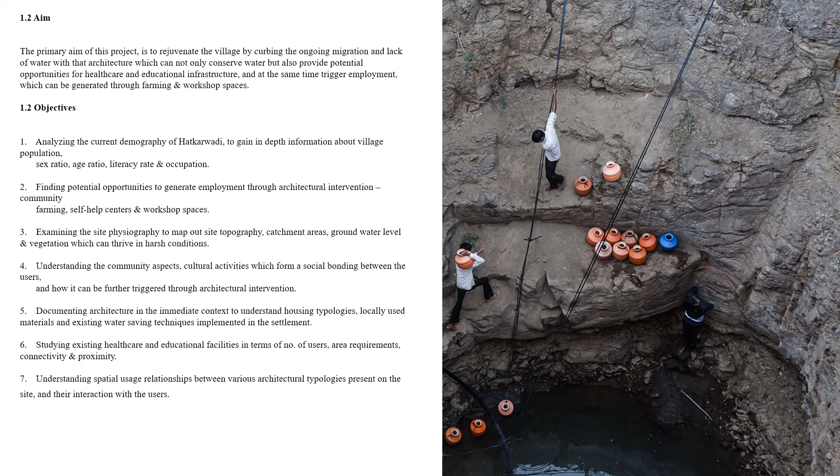Scopes and limitations: the scope lies in studying the settlement of Hatkarwadi, analyzing its demographics and present situation with regards to education and healthcare, to try and arrive at a multifaceted architecture that can not only tackle the issues that come up, but also keep in mind the aspects of community involvement and sustainability.

Although in a real life scenario a real-time procedure has to be followed to locate potential water sources by means of a piezometer survey, here we don't have the means to do the same. However, an informed guess has to be taken to the best of what is possible by referring to the current well locations, the site survey, and where the potential water resources are found.

Here, a table is given acknowledging all the challenges and the solutions to the challenges which Hatkarwadi presents.

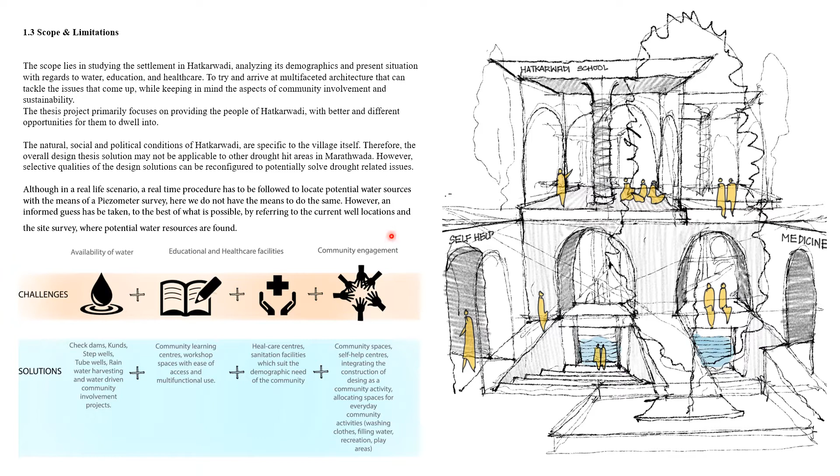A public survey was conducted to understand the views of fellow individuals on water conservation and drought conditions. It is observed that a large number of people know about the water scarcity in Maharashtra but not in depth. Most individuals also agree that solving the water crisis will in turn lead to reduction in migration. There was a positive response when asked if traditional techniques like step wells, bawris and kunds can be re-engineered to conserve water in today's times.

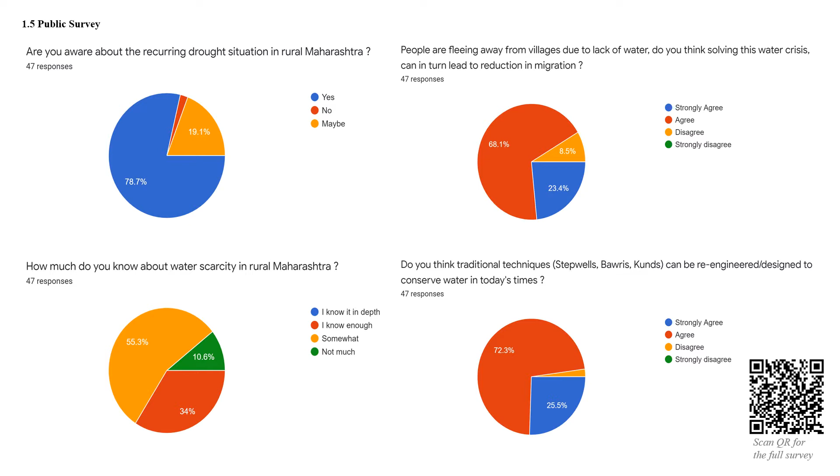The literature study has been divided into four sub-chapters, which focused on the study of drought, groundwater and aquifer recharge, water conservation, and building bylaws.

Drought definitions: the meteorologist defines drought as a lack of precipitation, while the agriculturist defines it as a crop failure due to lack of soil moisture. The hydrologist defines drought as a reduced surface and groundwater level, and for urban planners it is a shortage of drinking water. So there are various different definitions of how a drought can be defined, and some of the commonly accepted and used definitions are given below.

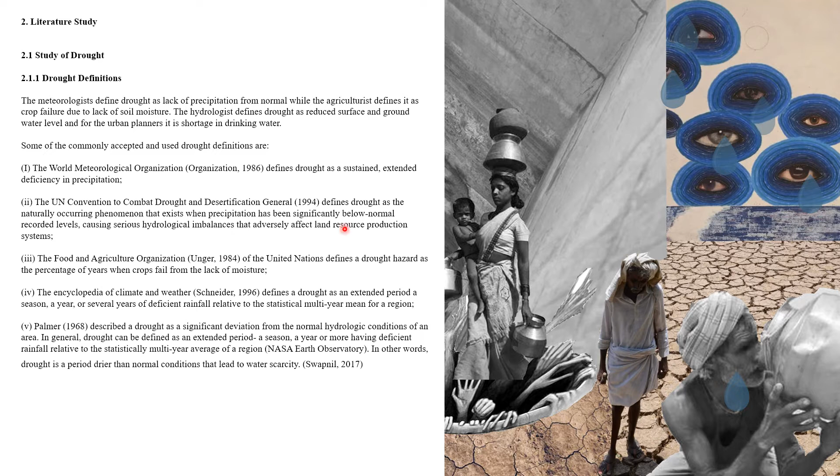Types of droughts: droughts are classified into four major categories such as meteorological, agricultural, hydrological and socio-economic drought. Meteorological drought is usually defined as a precipitation deficiency from climatic normal over a specific period, while agricultural drought occurs when there is insufficient soil moisture to meet the needs of a particular crop at a given stage.

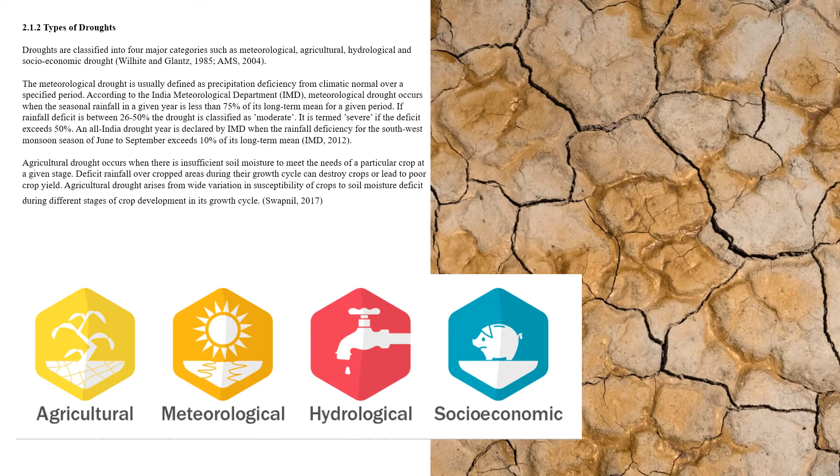Agricultural drought is further categorized by the timing of rainfall deficiency in the southwest monsoon period and its impact according to the crops and their growth stages. It is mainly divided into three categories: early season drought, mid-season drought, and late season drought.

On the other hand, hydrological drought is defined by the departure of surface and subsurface water supplies from some average conditions at various points of time. The table here shows us natural climate variability and its various impacts with regards to economic, social, and environmental impacts.

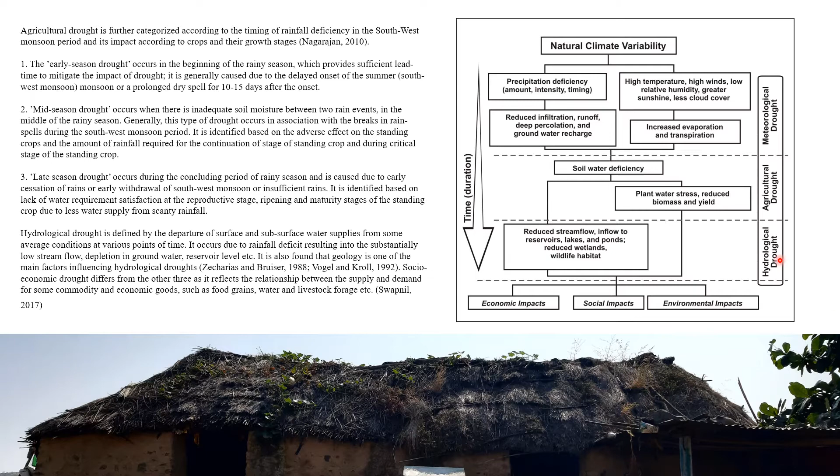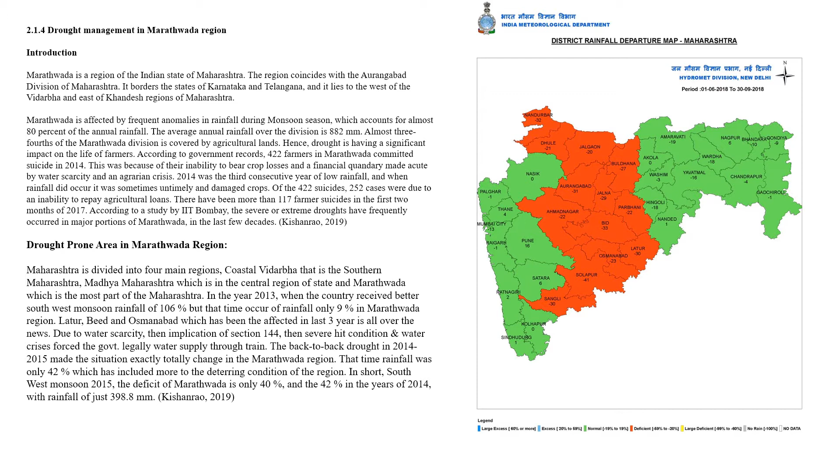Drought management in Marathwada region. In this chapter, we look at the drought-prone areas in the Marathwada region, and some of the initiatives taken by the government in the view of schemes which can help in tackling water scarcity and the issues generated through drought conditions.

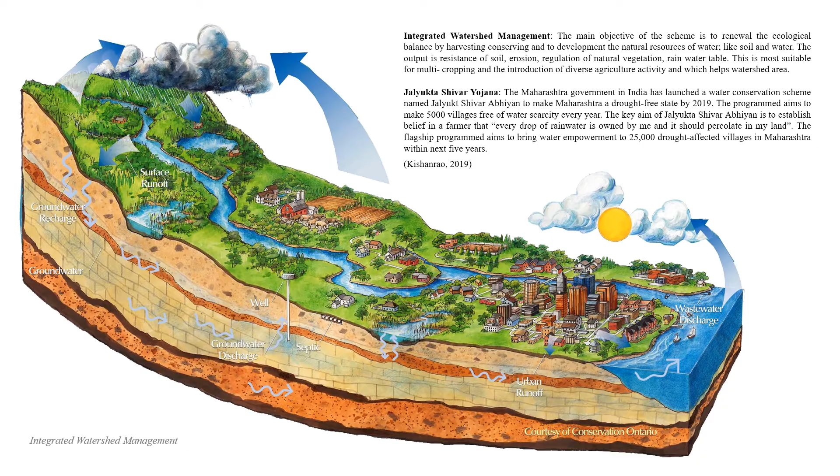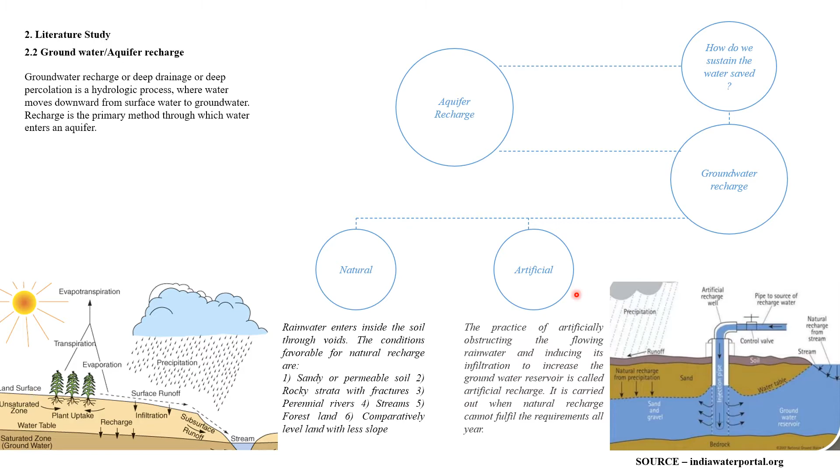Groundwater and aquifer recharge: here we also look at various groundwater and artificial recharge techniques, both natural and artificial. This slide shows how these techniques can be used in the context of Hatkarwadi.

The present condition in Hatkarwadi only allows specific recharge methods to be used. A combination of artificial channel, recharge wells, and injection methods can be used to efficiently recharge the ever depleting groundwater in Hatkarwadi.

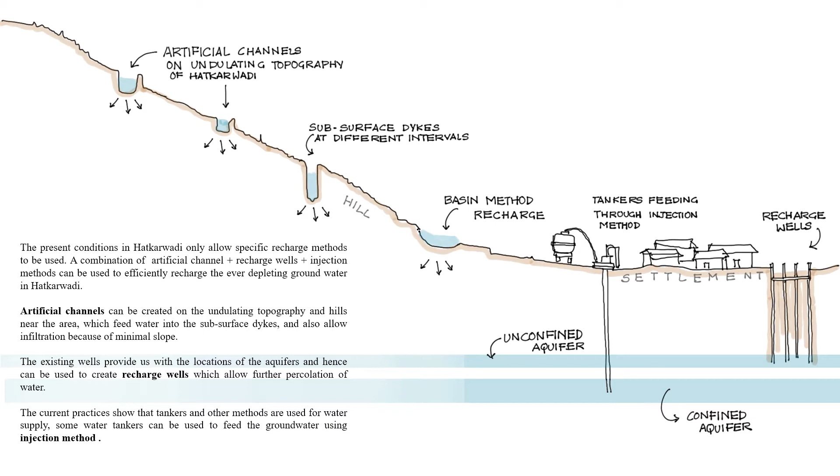Here are some examples of how these techniques are implemented in a real life scenario.

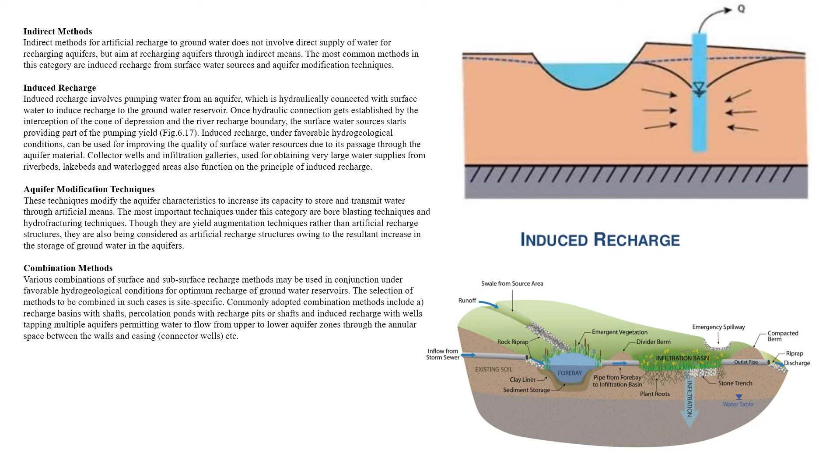Water conservation architecture: the stepwells of Gujarat.

Gujarat is a state on the western coast of India with a coastline of 1,600 kilometers, most of which lies on the Kathiawar Peninsula. It has a population of 60 million, making it the fifth largest Indian state by area and the ninth largest by population.

The construction of stepwells in the arid and hot climate of Gujarat, similar to Hatkarwadi, is an interesting example of people's response to adverse climatic and geographical conditions. These structures preserve and store water, the most essential precondition of life, as long and fresh as possible even during the hottest summer months. They have narrow stairs going deep into the earth to expose as little surface area as possible to the sun, providing large areas of shade across various stories and galleries.

With recent industrial development, many stepwells have lost their inherent function of water supply and storage, and are either deserted or in a broken-down condition due to neglect and lack of interest from people living nearby. However, a large number of stepwells are still in use, especially by women who fetch water, wash clothes and utensils, or bathe in them.

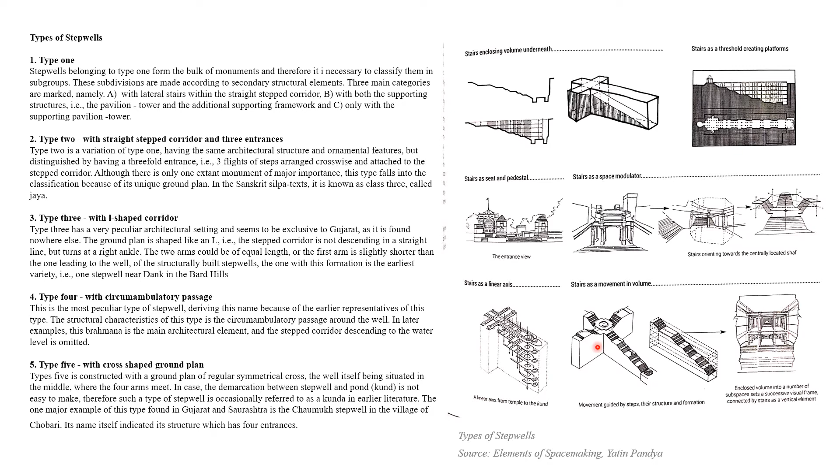There are various types of stepwells, primarily categorized on the basis of approach and movement in volume. The figure on the right shows how these stepwells exhibit different spatial qualities.

A bauri is a man-made pond with significant ornamental and architectural structure for conservation of water in ancient India. These wells are commonly found in the western region of India for irrigation and storage of water, mainly to cope with seasonal fluctuations.

Abaneri near Jaipur has the largest stepwell of India, named Chand Bauri. It is situated 95 kilometers away from Jaipur and is a fine example of architectural expertise, with 13 stories and 3,500 steps. It is the deepest in the world.

Hatkarwadi is a village so imperceptible, with its small population, that it faces little or no effect of the building bylaws. However, it is important to acknowledge the bylaws during design. Hence, these laws are taken from the CPWB and pertain to Beed district as a whole.

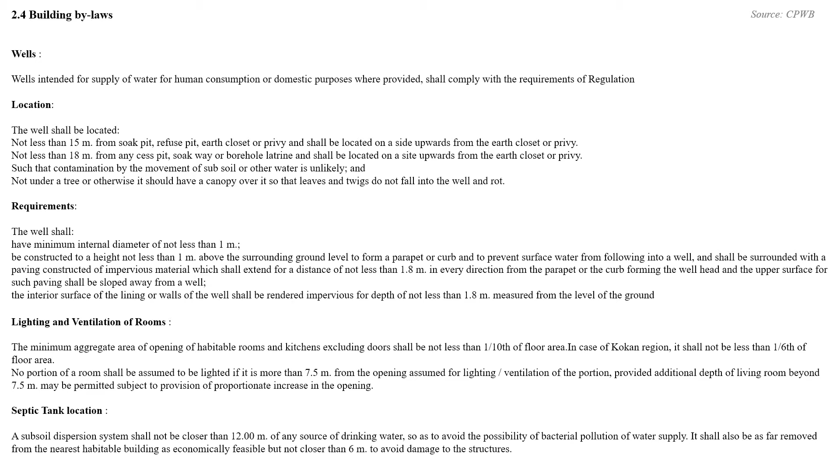The case studies identified for this design topic are categorized based on the challenges Hatkarwadi faces today: availability of water, educational and healthcare facilities, and community engagement.

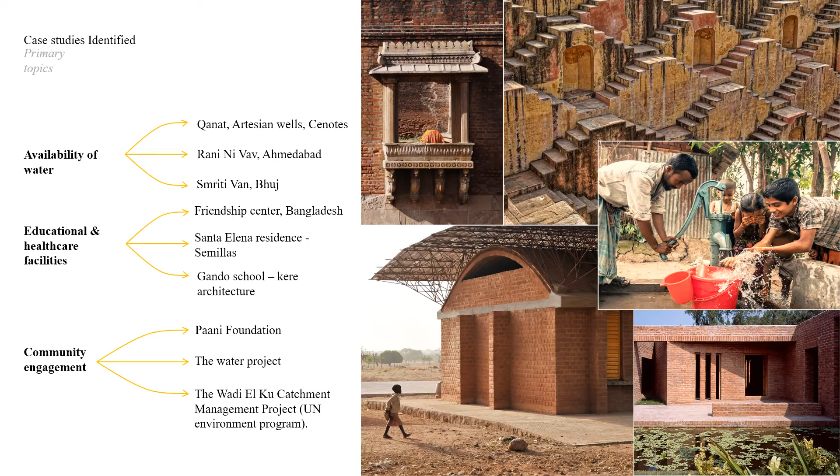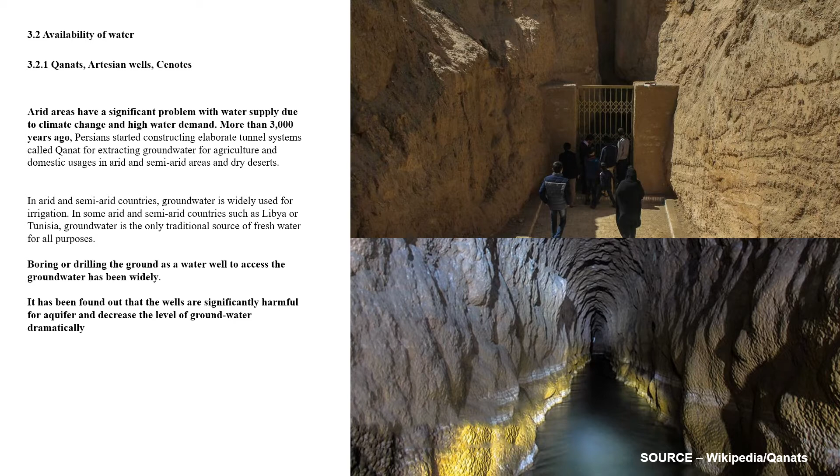Availability of water: arid areas have a significant problem with water supply due to climate change and high water demand. More than 3,000 years ago, Persians started constructing tunnel systems called Qanats for extracting groundwater for agriculture.

Qanats are artificial underground water channels up to 300 meters deep beneath the earth's surface, bringing a continuous stream of water for human, agricultural, and domestic use. The water is not lifted to the surface but flows down through a channel, as if a normal well has been flushed over on its side, until it flows out from its aperture. Qanats are usually excavated where there is no surface water.

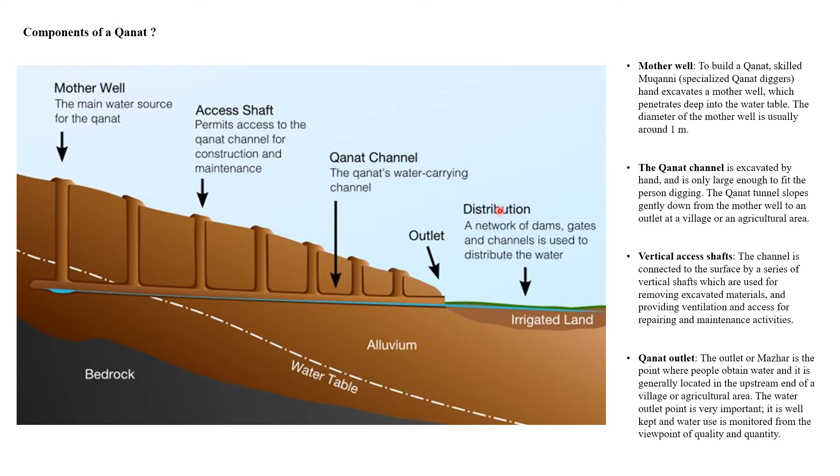There are various components of Qanats: the mother well, the Qanat channel, vertical shafts, and the Qanat outlet. The mother well is the main source of water for the Qanat. The access shaft permits access to the Qanat channel for construction and maintenance. The Qanat channel carries water, and the outlet is where distribution happens through a network of dams, gates, and channels.

Modern-day Qanats: a rainwater infiltration system can be applied with the Qanat system to maximize infiltration during times of intensive rain in the desert, or to protect Qanats from collapsing.

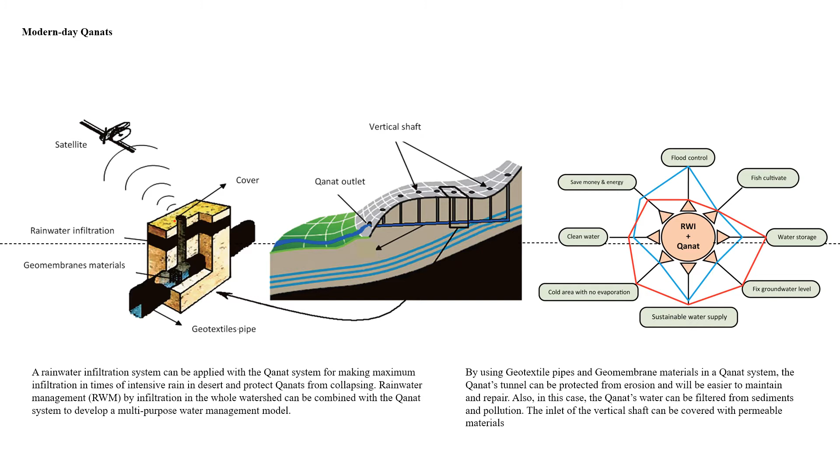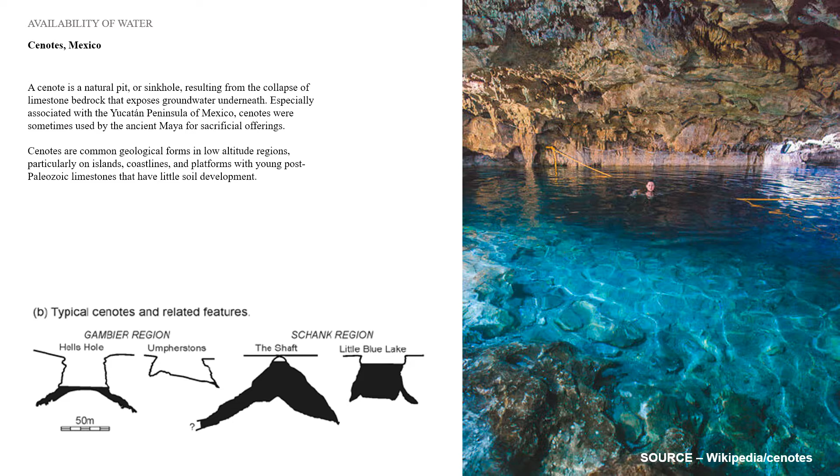Cenotes, Mexico: a cenote is a natural pit, a sinkhole resulting from the collapse of limestone bedrock that exposes groundwater underneath. A vast majority of cenotes are located in the Yucatan Peninsula. These areas have very porous and soft limestone soil, which, when collapsed by the action of rain and underground rivers, gives rise to the formation of cenotes.

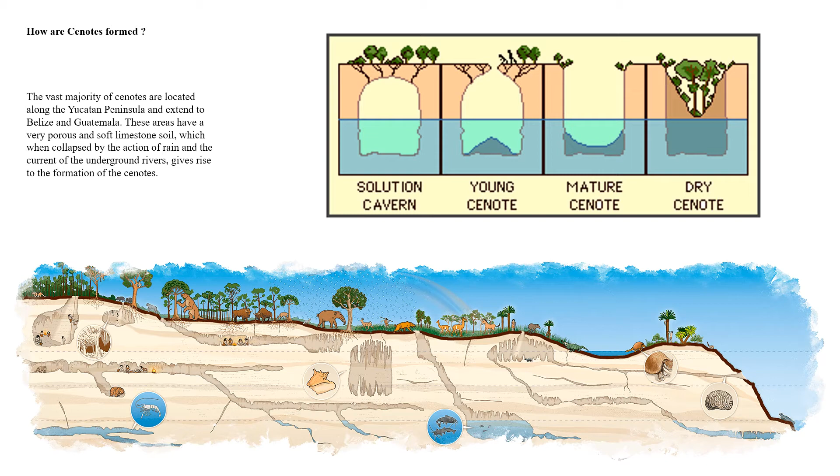Cenotes are very much interlinked with civilization. At Chichen Itza in Mexico, the cenotes were first found and the civilization was built around them. Similarly, the Kankalitala Shaktipeeth in West Bengal has a cenote around which the temple is situated, and it is said the water never dries up. This tells us about the interaction between humans and water.

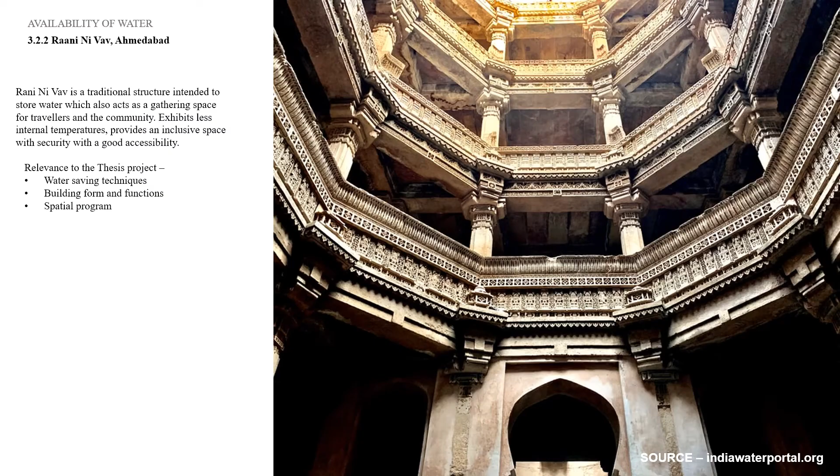Rani ni Vav is a traditional structure intended to store water, which also acts as a gathering space for travelers and the community. It exhibits less internal temperature and provides an inclusive space with security and good accessibility.

Rani ni Vav is categorized as a subsoil aquifer. It is oriented east-west, with the well in the west and the entrance in the east. It measures up to 64 meters long, 20 meters wide, and 27 meters deep.

It has four essential components: a staircase leading from ground level to the underground basin, a multi-storied pillared pavilion which can be used as a good community space, a draw well at the end, and a large tank to store surplus water from the well.

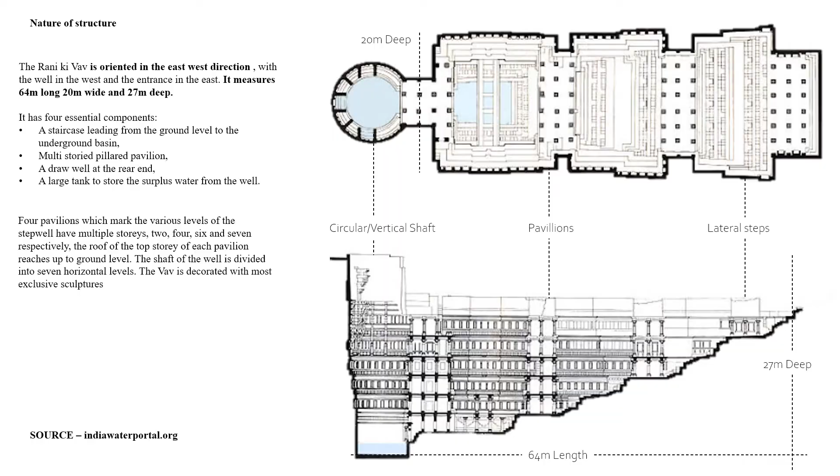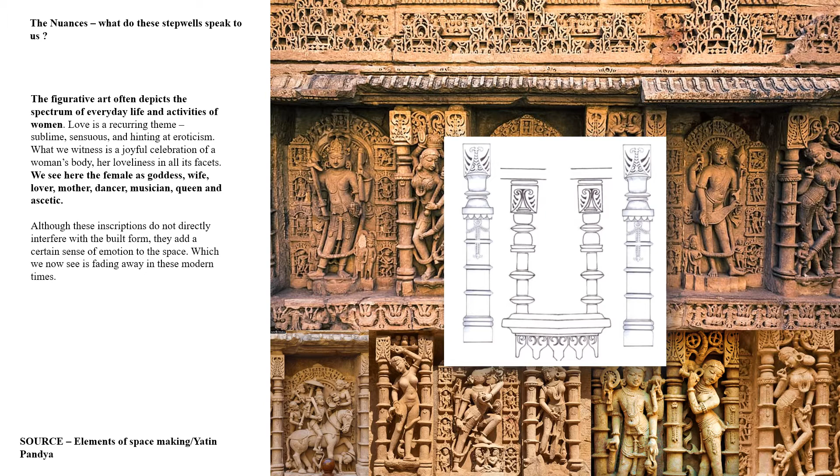The figurative art often depicts the spectrum of everyday life and activities of women. Although these inscriptions do not directly interfere with the built form, they add a certain sense of emotion to the space, which we now see fading away in this modern time.

The Earthquake Memorial, or Smriti Van, is envisaged as a rejuvenation of this landscape and as a tribute to the extraordinary resilience of the people and their acceptance of the calamity with great equanimity. The client's brief for the memorial was planting 13,805 trees, each representing one victim.

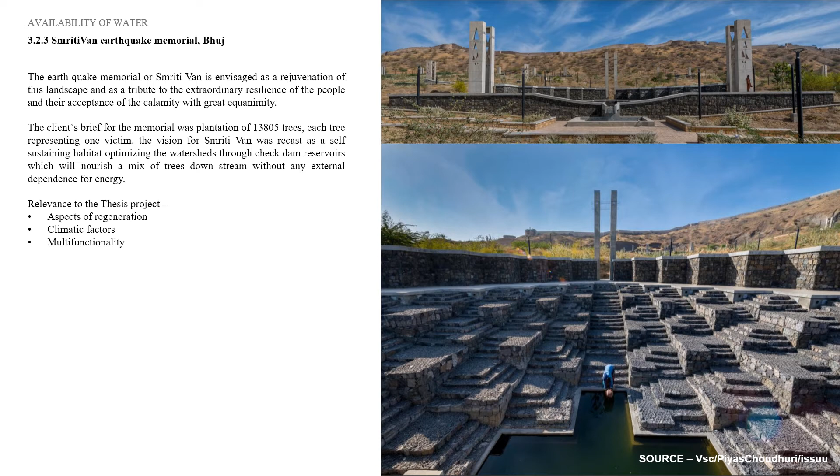The vision of Smriti Van was recast as a self-sustaining habitat, optimizing the watersheds into check dam reservoirs which will nourish a mix of trees down the stream without any external dependency. The relevance to this research project includes aspects of regeneration, climatic factors, and multiple functionality.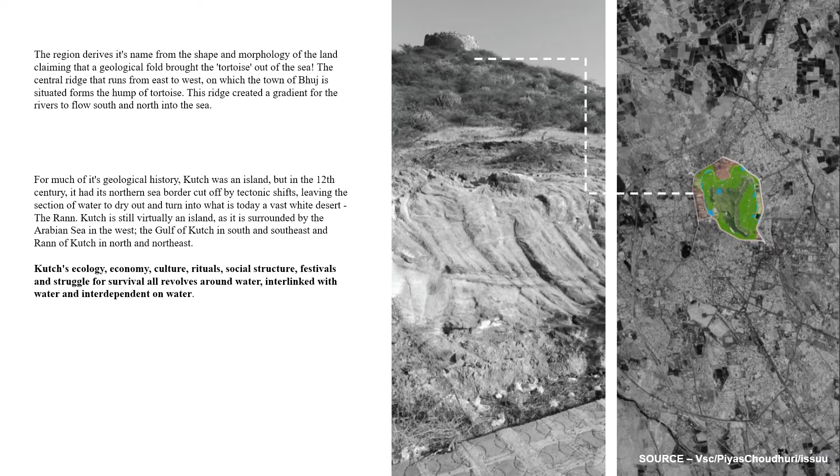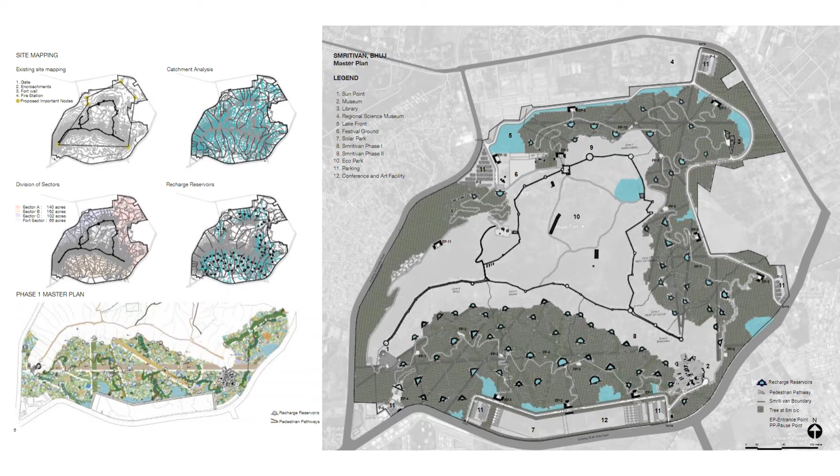This is the master plan for Smriti Van. The master plan envisages 81 reservoirs to collect the runoff from Bhujiyo Dungar. This gives us an idea of the scale of Smriti Van.

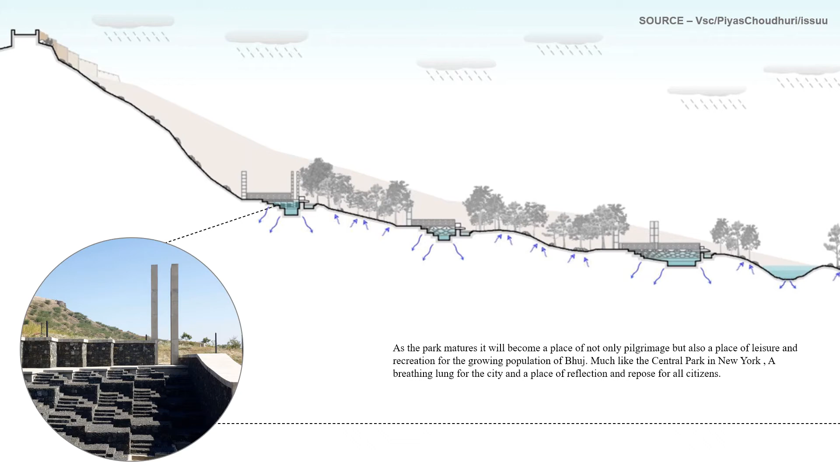Here we can see the section of the check dams through various contour levels on the Bhujiyo Dungar. The reservoirs are made of gabions, which are entirely without mortar and thus allow for arresting rainwater of the watershed, but also allow it to dissipate into the ground slowly, allowing the root system of the trees to draw upon it.

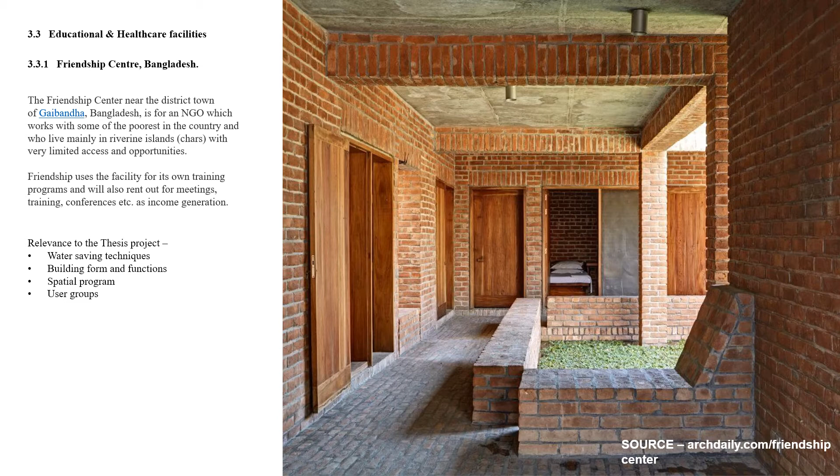Educational and healthcare facilities: Friendship Center in Bangladesh. The center serves and brings together some of the poorest of the poor in the country, and by extension in the world. Friendship uses the facility for its training programs and also rents it out for meetings, trainings, and conferences as income generation. The users are mostly construction workers, maids, rag pickers, and NGO workers.

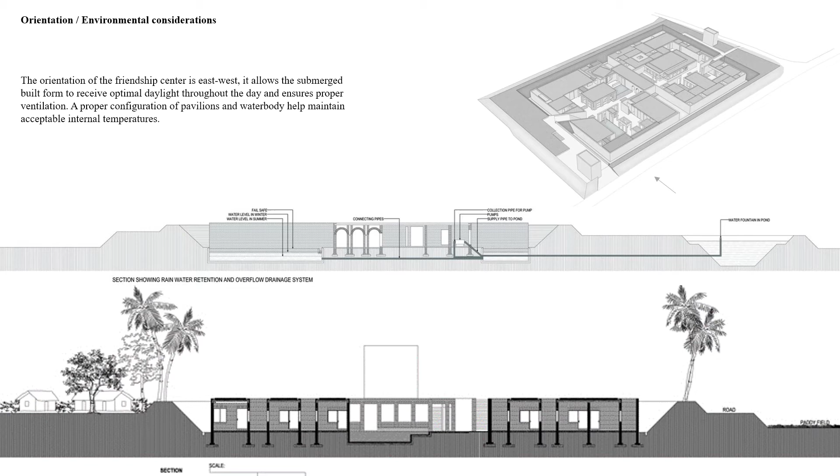The Friendship Center is essentially arranged in two blocks, the Ka block and the Kha block. Here we can see the spatial organization and the circulation.

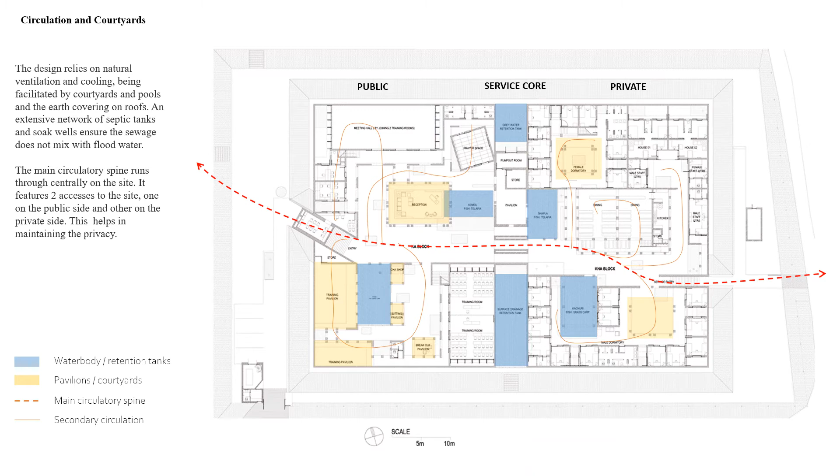Retention ponds capture the diverted storm water. These ponds provide two primary services: they retain the runoff before releasing it, and they release the water at flow rates and frequencies similar to those that existed under natural conditions.

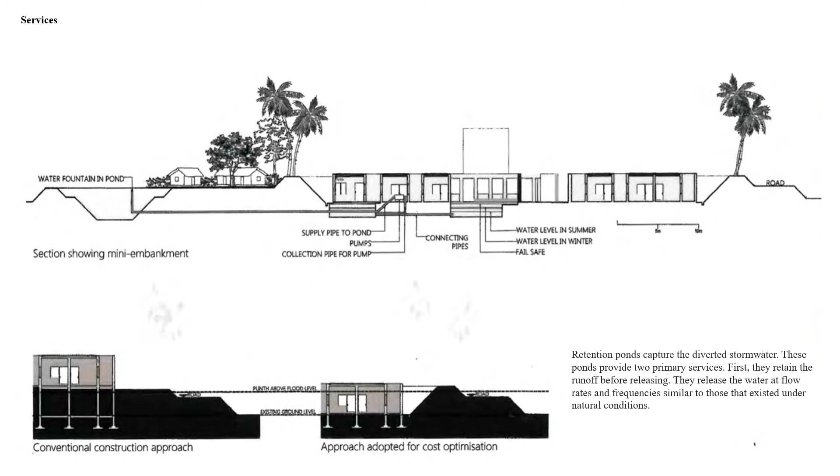Gando is a village of 3,000 inhabitants situated in the remote east of Burkina Faso. Most of the people are subsistence farmers with their livelihoods dependent on the harsh climate. There is virtually no rain between October and June, and the daytime temperatures can reach 45 degrees Celsius in the shade.

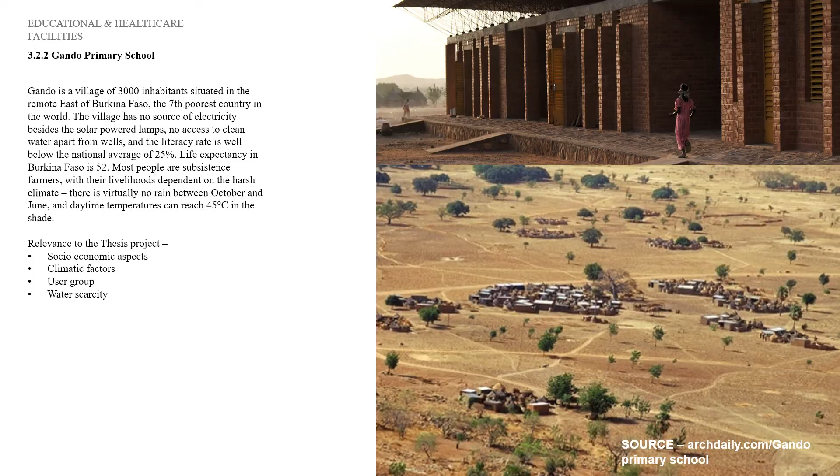The user age group is from 6 to 15 years.

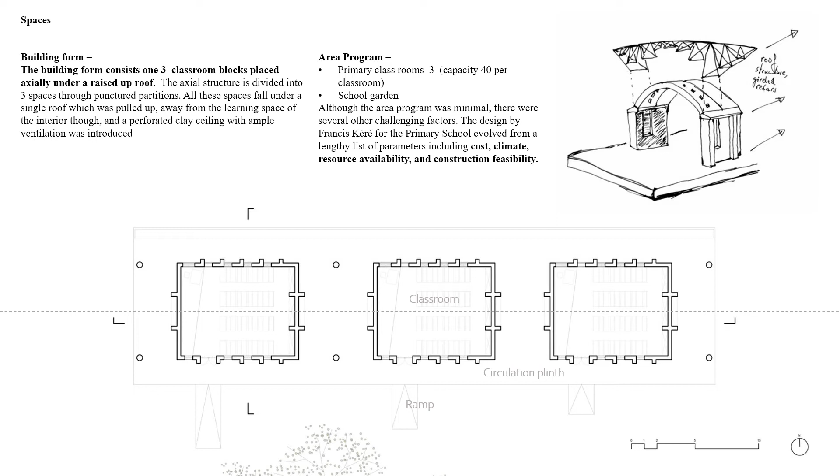Circulation pathways on the raised plinth surround each classroom.

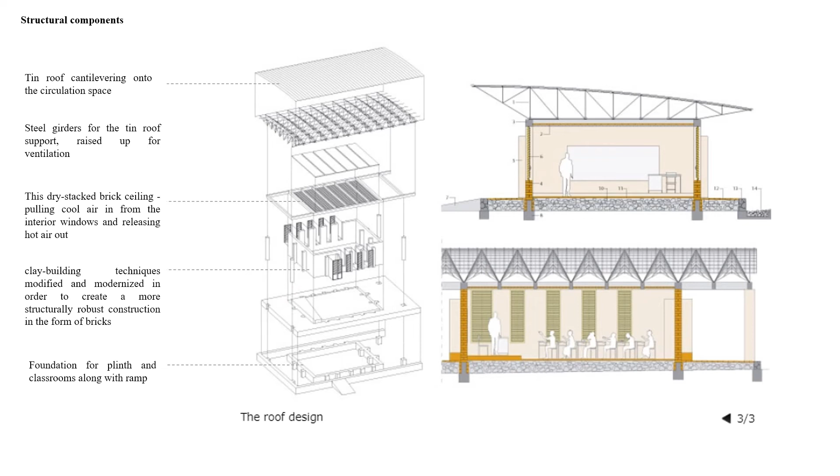These are the structural components of the school. You can see three common materials which are used in the Gando Primary School.

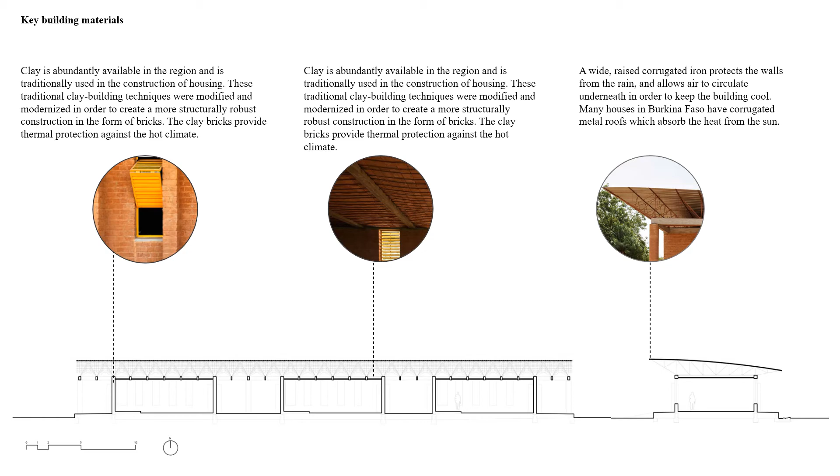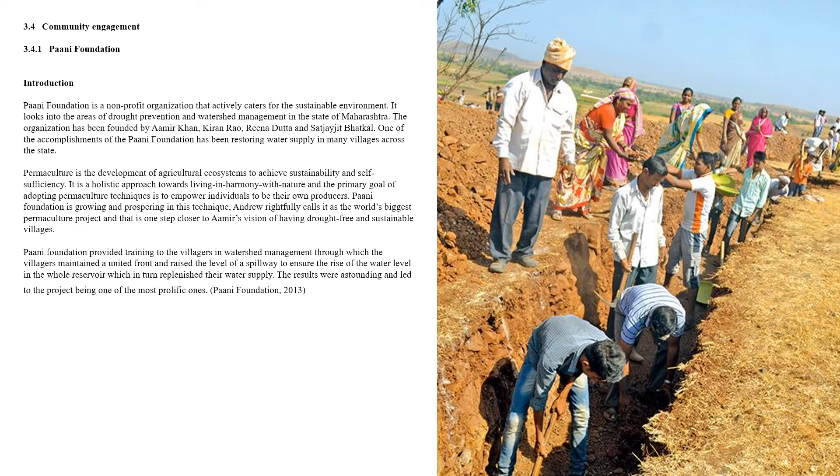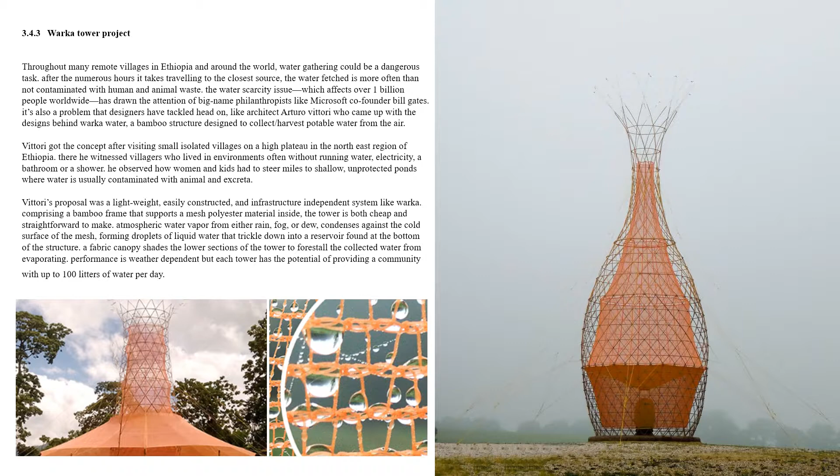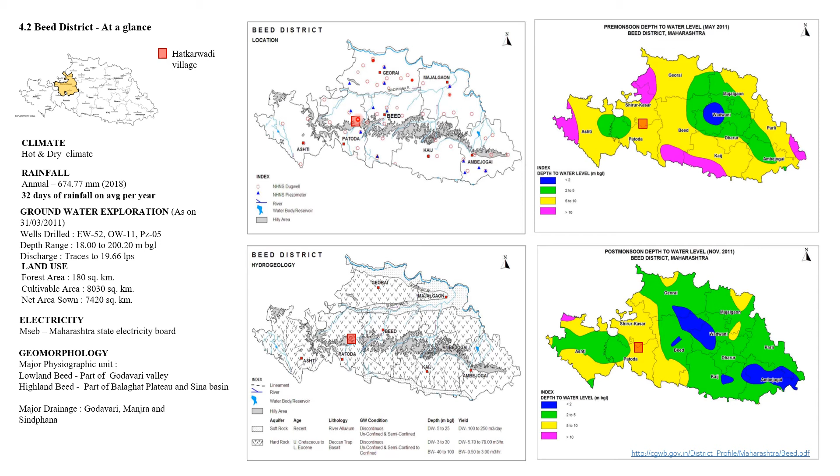The red dot is our site marked with respect to the district of Beed.

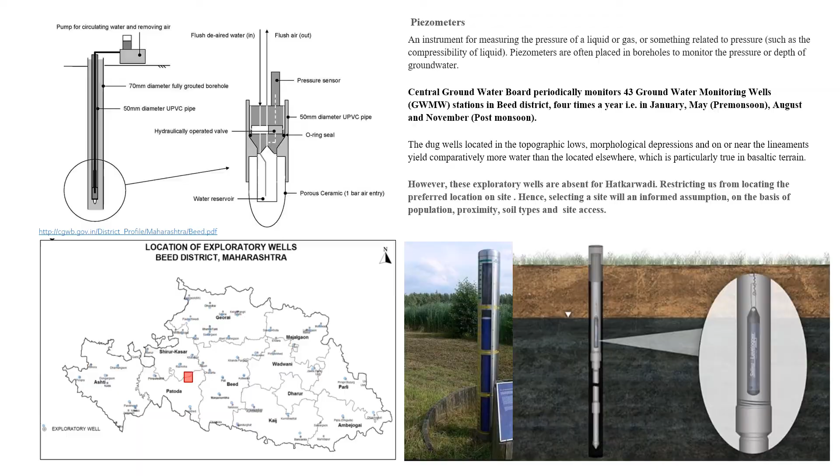Hatkarwadi consists of three prominent settlements, out of which settlement 1 and 2 are comparatively larger in scale and density. Settlement 1 and 2 are located approximately 1.5 kilometers apart.

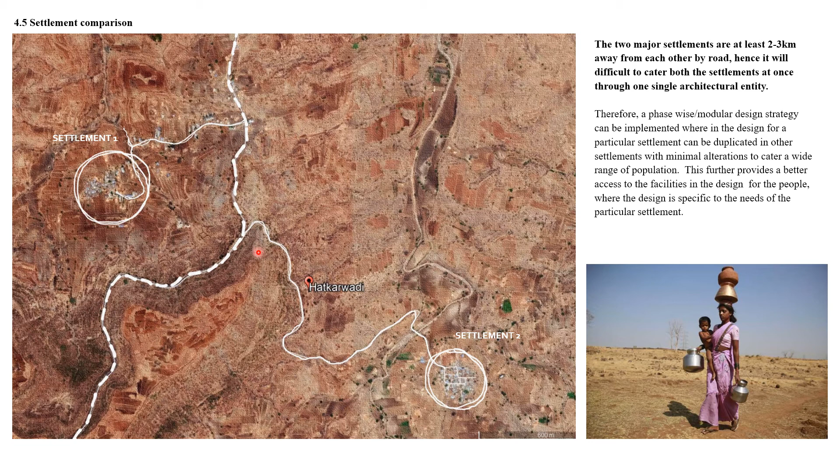The two major settlements are at least 2-3 kilometers away by road, hence it will be difficult to cater to both settlements at once through one single architectural entity. Hence, a site is selected between the two settlements and the potential is calculated.

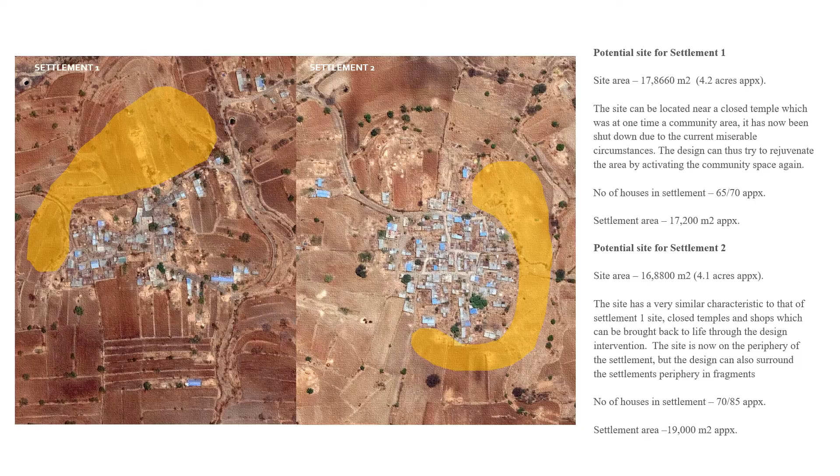The factors for selecting the site at settlement 2 majorly rely on population. The number of occupants and users in settlement 2 are considerably more than settlement 1, and proximity to the population. The site at settlement 2 provides better proximity and access to the settlement as it is located on the periphery.

It is observed that the certain segment has a persistent presence of deep soil, therefore increasing the chances to procure water, which is the need of the hour.

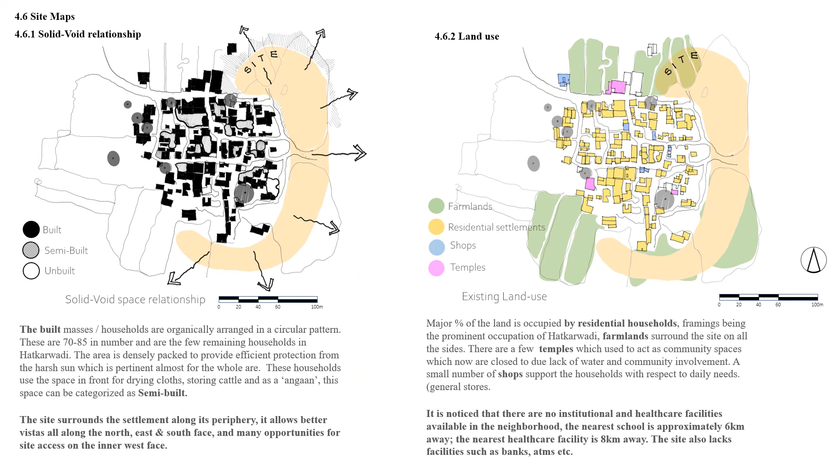Here we see various maps which show various aspects of the site. This is the existing vegetation on site and what can be proposed as and when the design intervention happens.

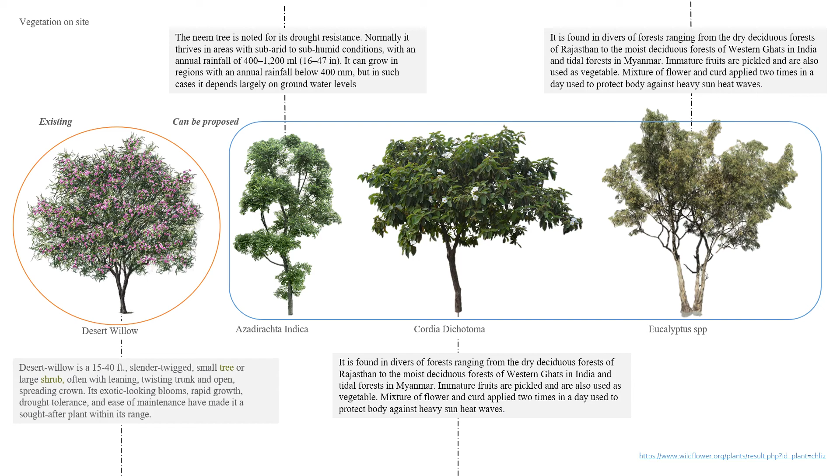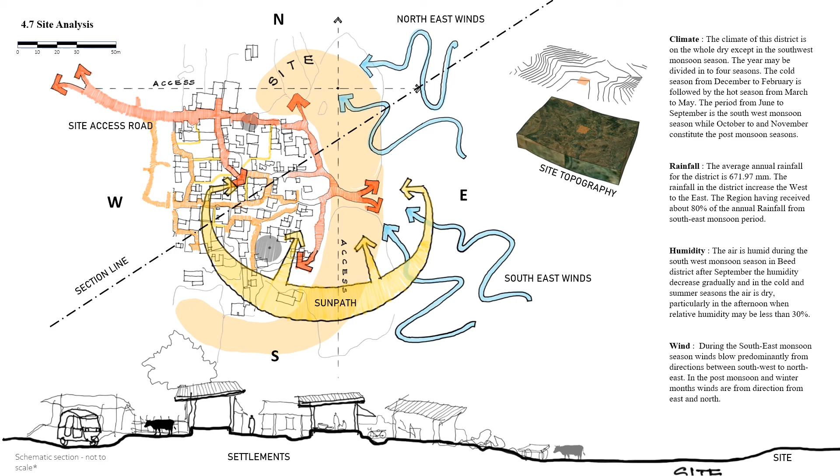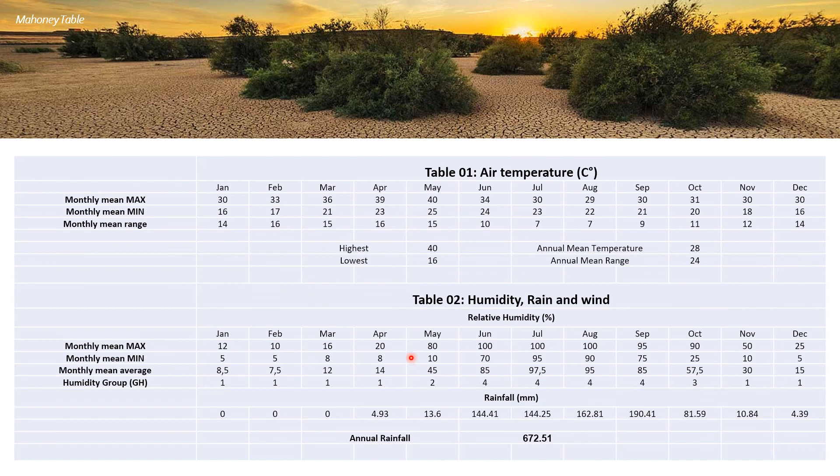Here, the climate data of Hatkarwadi is fed into Mahoney. And the indicators help us understand which category it falls into.

We can infer from Mahoney data the various spatial aspects such as layout, spacing, air movement, size of wall openings, position of openings, walls, floors, roof, outdoor sleeping and rain protection.

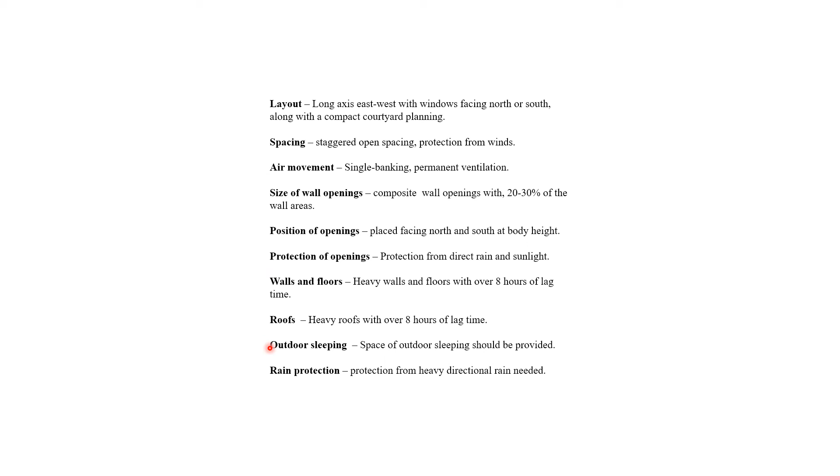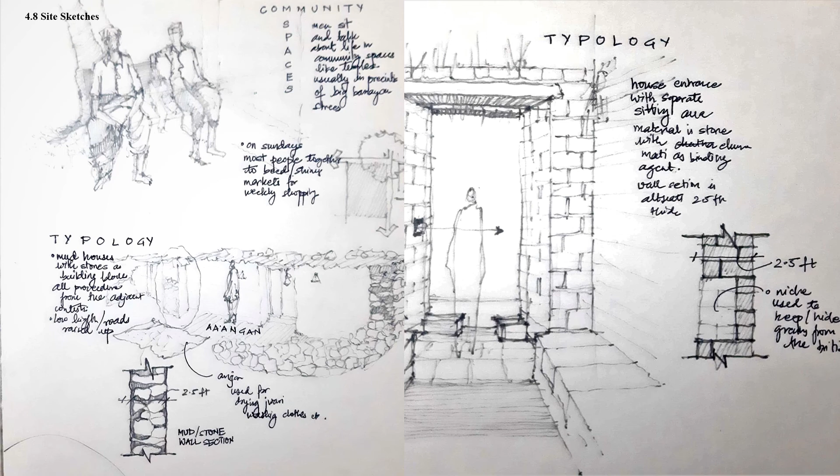These are the site sketches which depict various architectural entities and typologies which are present in Hatkarwadi village. There are different types of houses - stone houses, mud houses and brick houses - which differ on the basis of construction and usage.

The user group can be primarily categorized into two groups: migrant population and permanent residents.

The built environment endeavors to create an environment which reflects community interaction and engagement. While not overpowering the existing settlement, the design aims to provide spaces for everyday activities such as education sessions, self-help centers, and healthcare facilities. The thesis features another important element of water conservation and everyday community activity which involves a majority of women in the village.

Hence, the relationship between the user and the built environment becomes very important.

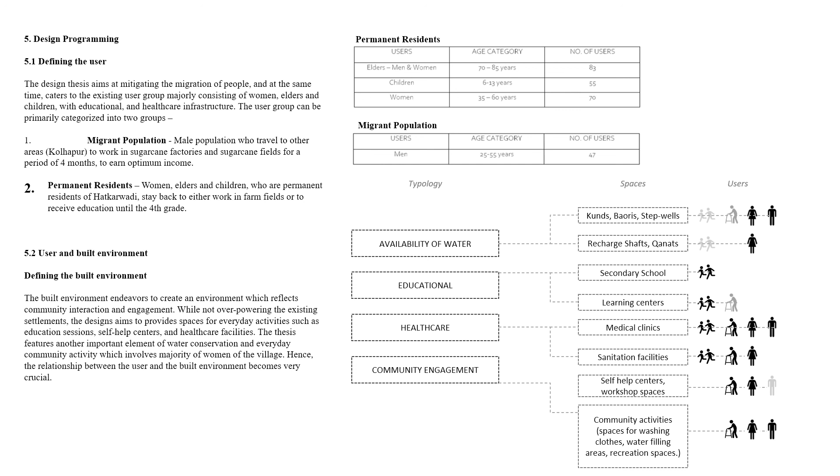The area program is iterated by considering various case studies and design standards. The primary, secondary and tertiary activities have been identified on the basis of user relationship and their core functions. The areas are referred from case studies and inputs and are subjected to change.